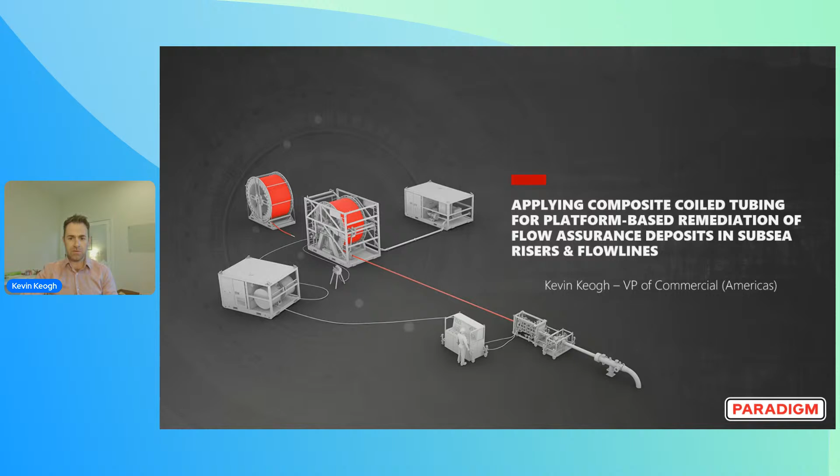So that brings me to the topic, and you'll notice that I haven't used the brand name here. We're titling it Applying Composite Coiled Tubing for Remediation of Flow Assurance Deposits in Subsea Risers and Flowlines. And I don't need to tell you guys that flow assurance in deepwater production is a pretty challenging discipline.

One of the reasons for that is that it sits at the convergence of many other technical domains. So reservoir, subsurface, subsea, production, process, and it relies really quite heavily on high quality inputs from each of these disciplines. Flow assurance risks also tend to be fairly catastrophic.

Many disciplines deal with continued degradation. So for example, if you have a reservoir that underperforms, then you can expect lower rates. If you have higher water cuts, then you're going to have increased OPEX to manage water. But if we form, for example, a hydrate in a flow line, then we have a complete production shut-in.

And in some fields, like the pre-salt, for example, where you might have flow lines that are producing 50,000 barrels per day, that equates to about $3 million per day in lost revenue in the event of a hydrate blockage. So the CEO is going to be calling you pretty soon in that eventuality.

So I think it's worth considering some of the secular trends that are at play here when we frame this challenge. And a lot of these were actually discussed at the SPE Subsea Symposium event, which I attended last week in Rio. We all know we're moving or probably have moved into ultra deep waters where we have ambient temperatures as low as 2.5 degrees Celsius, extreme hydrostatic pressures.

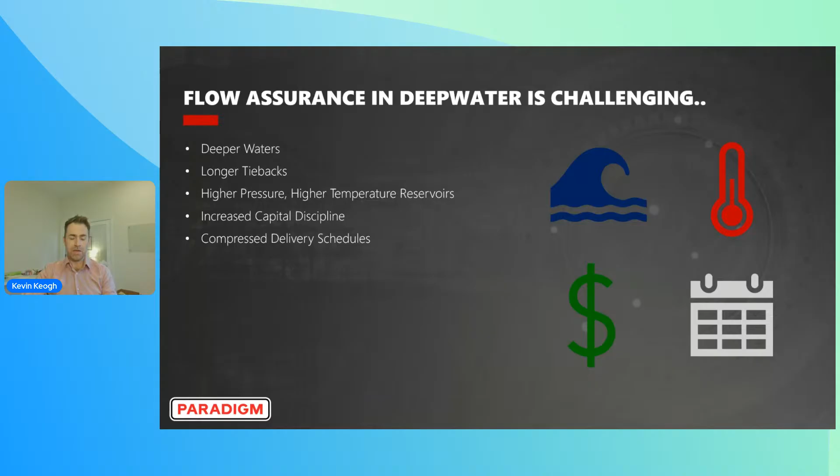And these are engineered and installed also under quite compressed delivery schedules. And sometimes that can mean compromising on specification of the system. So I know of many new developments where, for example, they may be using an 8-inch instead of a more optimal 6-inch flow line, purely to try and accelerate delivery because of availability constraints.

So there are challenges aplenty, and I think there's an acceptance that the requirement for intervention to remediate solids deposits is somewhat inevitable. But the problem here is that there are relatively few proven technical solutions to these challenges, and that these are mostly depending on using DP2 or DP3 class intervention vessels. And the cost of these is fairly significant. Sometimes it can be in excess of $400,000 per day, and that's on top of mobilization and demobilization costs in the region of $1 to $3 million, so very expensive.

Added to that, in Brazil and the Gulf of America, the spot market for these type of vessels is really quite tight. Many vessels have been repositioned over the last few years into the renewable sector, so we're competing for less and less vessels of opportunity. And this is a particular disadvantage to the smaller operators that are operating perhaps mid and late life fields.

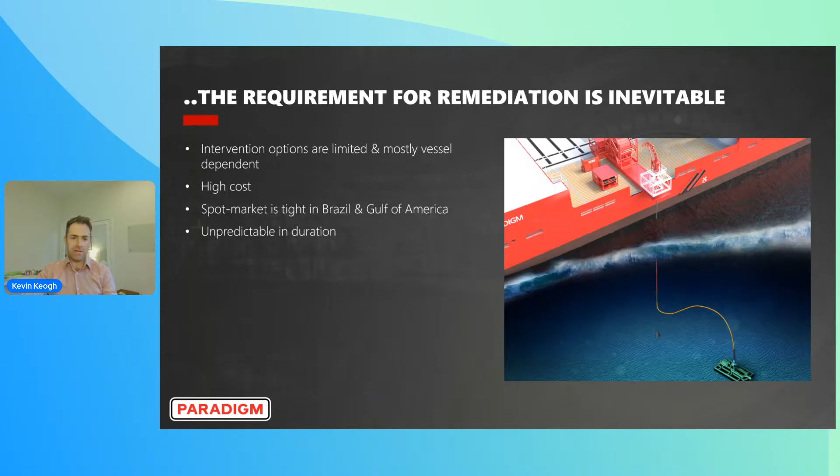Further, the duration of vessel-led remediations is also inherently quite unpredictable. Factors such as weather can really affect how long it might take to, for example, remediate a hydrate blockage. So that makes budgeting and cost control even more challenging.

And so this brings us to FlexiCoil, which is a platform-based solution that we believe can reduce vessel dependency and resolve many of the problems that we've highlighted already. I think the best way to describe FlexiCoil is as a miniaturized flexible coiled tubing system that resolves what are often fairly complex riser and flowline intervention applications. And the complexity is really around the logistics of executing these projects, less than about the work that we're performing.

But the two key applications that we have with FlexiCoil are either to re-establish or enhance production, where you have some kind of flow assurance deposit that is constraining it. So paraffin wax, sand, asphaltene, and of course hydrate.

And then the other application that we're not really going to touch on today is about improved oil recovery. And we can do that through retrofitting the FlexiCoil tubing permanently inside the riser to give you artificial lift. So either in-riser gas lift or just to act as a velocity string. So to reduce the cross-sectional area of the riser and to help boost velocity of the production stream, which can obviously help mitigate certain late life issues that we might have, like slugging, for example. But for the purpose of today's presentation, we'll focus on remediation of solids deposits.

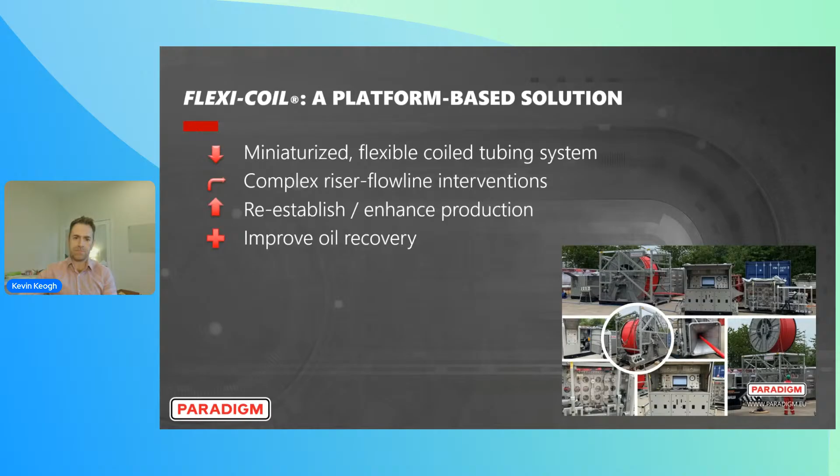So I think it's useful to give an overview of the equipment spread. These are the various FlexiCoil components. The ones to draw your attention to are in the bottom left of the screen here. So here we have a horizontal injector. This is the component that grips our tubing, pushes it into the riser and flow line, and pulls it back out again.

Just ahead of that, we have this dual stripper system. So this is a dual 10K stripper system. This is what seals around the outer diameter of the FlexiCoil tubing and maintains a seal at all times during the operation. And then on the front end here, we have a dual shear seal BOP, also 10,000 PSI rated.

The other component that's worth drawing attention to is the reeler system. So we have a maximum of about 2.1 kilometers of our tubing on any single drum. But we have this, as you can see, drop-in drum type arrangement where we can actually connect multiple lengths of tubing together to scale up our distance capability and our reach.

So when we've run 2.1 kilometers into the riser and flowline system, we actually isolate the tubing, we close a valve on the connector, we disconnect it from the reeler system, we remove the old drum, and then we drop in a new drum, connect those two together, equalize, and then we continue running into the line.

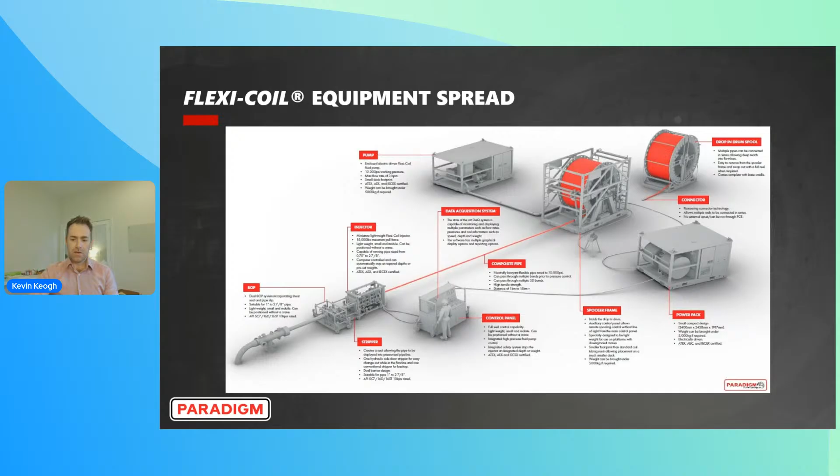So the key feature of FlexiCoil is how versatile we can be with how we actually deploy it on the production facility. So we actually work around the space constraints on the facility and any weight limitations that it may have too. And we've never not found a way to rig up this spread on any manned production facility. There's always been a configuration that has worked.

And the reason for that is just because we can be very adaptable with how we lay out the various components on the facility. And that's because we don't need direct vertical access into the riser. So conventional technologies, for example, like steel coiled tubing, FlexiTubo, they typically require you to have direct vertical access into the riser because the steel tubing itself cannot go through any bends prior to entering the riser. So it limits where you can position the equipment spread.

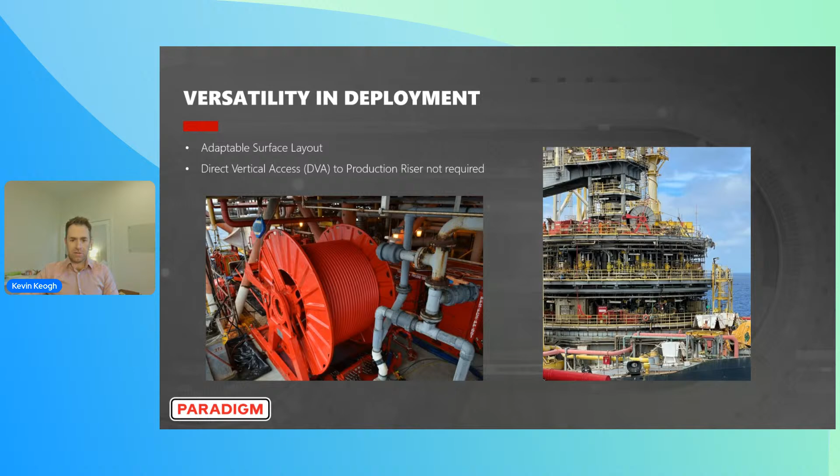It then reorients the tubing down through 2 decks, through another roller guide into the injector, stripper and BOP, and then into the production piping through the turret and then down the riser and into the flow line. So it just shows the adaptability of how we lay out the equipment on various types of production facility.

So the enabling part of this technology is probably the FlexiCoil tubing itself. So our standard tubing is a 2.375 inch, 2 3/8 inch OD product with 1.2 inch ID. It's specifically been designed and developed for riser and flow line intervention applications. It's 10,000 PSI maximum working pressure.

And the two key features are that it's extremely lightweight. So if we are pumping any fluid or any liquid that has a density similar to that of seawater, the tubing will actually be neutrally buoyant in the flow line. So instead of being under buoyant, being heavy and sitting in the bottom of the flow line, or being over buoyant and floating to the top, it sits in the middle. And that minimizes contact points. It minimizes drag, frictional drag, and that is what allows us to maximize our reach into the flow line. So that's a very important feature.

The other is that it's highly flexible. It has a minimum bend radius of around about 30 inches. So that means that we can run through up to 1,000 degrees of surface piping bends, hard piping bends, as long as their radius is 30 inch or above. So 6 inch 5D piping, for example, is navigable with FlexiCoil. It's also compatible with all production fluids and standard oil field production chemicals.

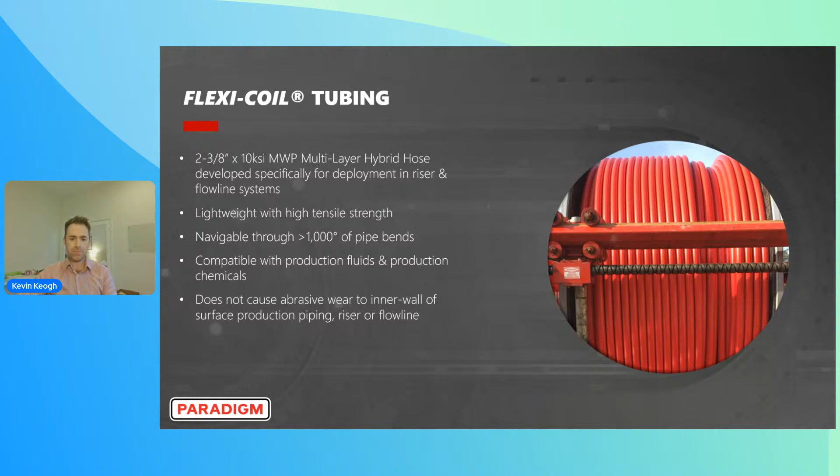So we have a couple of applications that we think would be of interest to share with you guys. The first is on FPSO Forte P50 in Brazil. And it's obviously an older facility, and some of the wells, most of them actually, are in either mid or late life. So they're seeing very high water cuts, which is obviously causing issues with hydrate formation in particular. So these wells and the FPSO are in approximately 1,240 meters of water depth. And the client had 3 tiebacks in particular, 3 flow lines where they had formed hydrates that was preventing production.

So the first part of the FlexiCoil solution is that we need to perform a site visit so that we can understand where we position the equipment on the production facility, as I mentioned before. We also need to design the tie-in spool that connects us from FlexiCoil into the surface production piping. But part of this visit was to actually locate the blockage itself. So we wanted to make sure that it was within reach of FlexiCoil and just to have some additional diagnostic data.

So we actually applied our Find-Block technology, which I'm not going to discuss in depth today, but I can tell you is a very low-cost, simple, non-intrusive technology for accurately locating blockages in flow line systems by using a hydraulic TDR type technique. We create a pressure wave in the system, and because we can record and we know the wave speed of that pressure wave as it travels through the fluid medium, and we know the time that it took to reflect from the blockage, we can calculate the distance to that blockage.

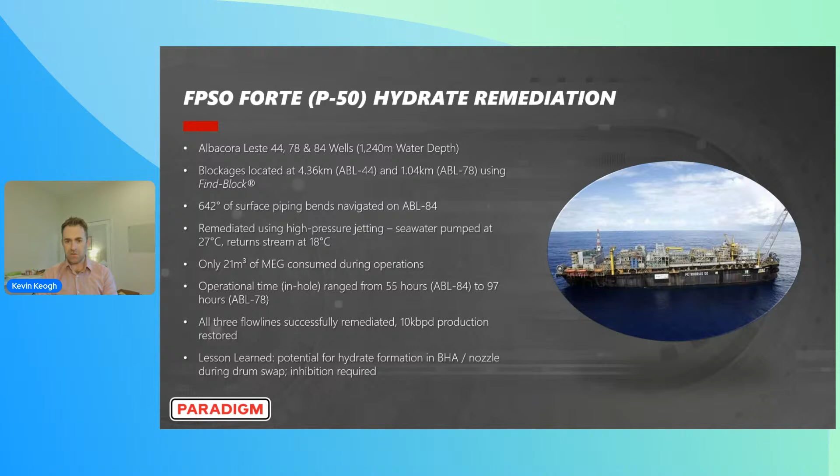So we updated our procedures for hydrate remediation in this fashion to dictate that once we're doing a drum change out or adding a length of tubing, we actually have to inhibit the system. So we will pump a pill of MEG or methanol around the jetting nozzle to ensure that there is no potential for hydrate formation. So a really valuable application, and I think a good introduction to the Brazilian market for our capabilities in hydrate remediation.

Another project that may be of interest is one that we completed in the Gulf of America a couple of years ago. This was a remediation project in an 8-inch flow line system tied back to the Neptune TLP in about 1,400 meters of water. The blockage was estimated at about 900 meters from the platform. It was believed to be a single asphaltene plug.

The usual features in FlexiCoil applications were present. We had about 685 degrees of pipe bends between FlexiCoil and the riser itself that we had to run through. But it was remediated in a similar method. We're pumping high pressure seawater, in this case with periodic solvent pills to try and bring the asphaltene more into solution. Ultimately, we cleaned to about 3,800 meters measured depth in the flow line, removing several tons of asphaltene in the process, and reinstated about 3,500 barrels of oil per day of production. So again, a very successful demonstration of FlexiCoil.

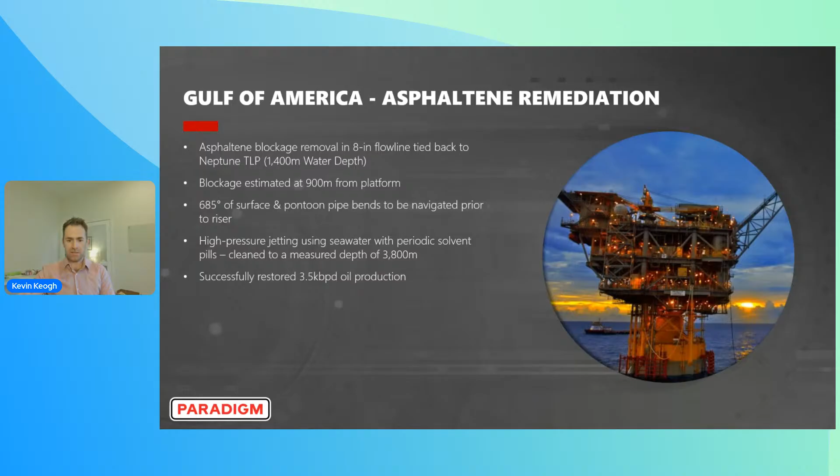This was the layout on that facility. Again, it's just a good example of how we can be flexible with how we position the equipment. So this is a multi-deck layout at surface. You can see in the image on the left, the reel positioned on this landing deck. In the center image, you will see the roller guide that I mentioned previously that reorients the tubing or takes the tubing down one deck. And then through the injector, stripper, and BOP. The item on the right-hand side is the control panel. That's where the operator would position himself and he would control the deployment and the retrieval of the tubing and manage pressures and all the other operating parameters of the campaign.

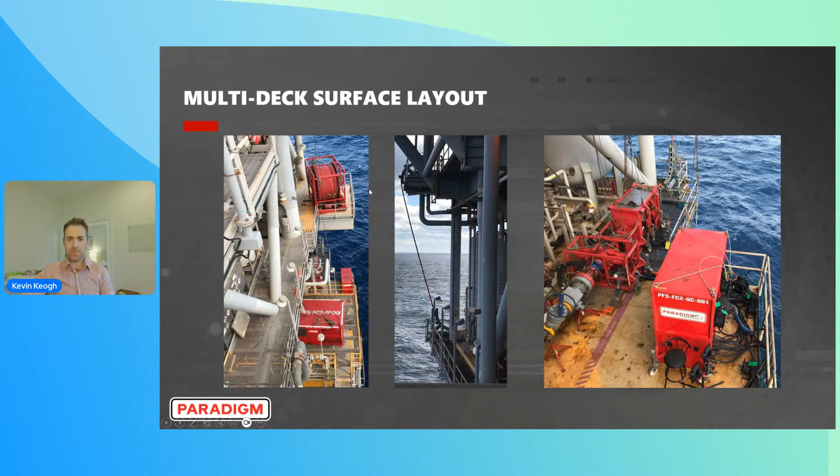So what about long distance tiebacks? You'll probably have noticed that in the cases that I've presented, our reach was under 5 kilometers in both of these applications. The reason for that is that FlexiCoil's current reach capability is up to about 6 kilometers, depending on various operating parameters. We have some initiatives to try and increase that reach.

For example, we are in the middle of a development program that's being done in conjunction with Shell here in the Gulf of America. We're developing a tractor technology that we will integrate with our tubing that will give us much greater pull force to pull us much longer distances into the flow line. So we expect that our reach capability will be in excess of 10 kilometers. And we are hoping that it is going to be ready in the second half of 2026 for its first field deployment here in the US.

But I'm conscious, we mentioned the Prio Wahoo development at 30 kilometers earlier. That still means that there's a significant portion of many flow lines that will be inaccessible to FlexiCoil from the production facility. So we can deploy FlexiCoil from a vessel subsea through various tie-in points. It's very important, to ensure that is an option, that we have early engagement during FEED or pre-FEED stages so that we can enable or optimize that kind of intervention. We would need to understand things like where we position access points, inline sleds, for example, at various points through the flow line so that we can access and enter from each of those and cover the flow line in full.